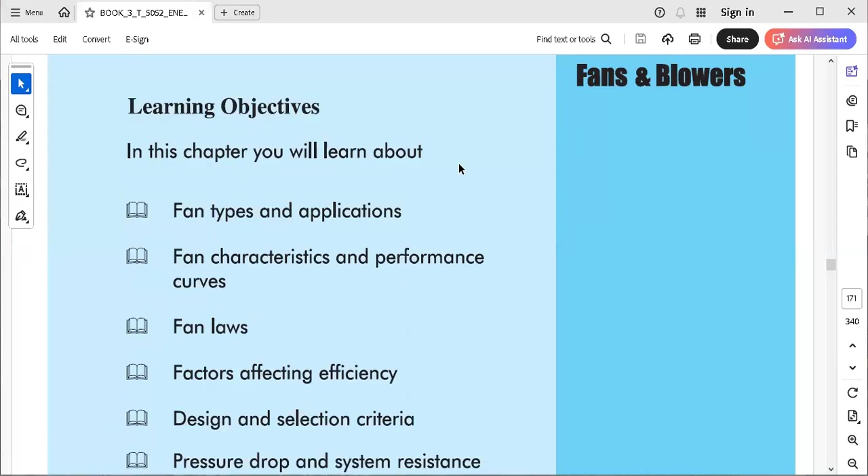Today's lecture is related to fans and blowers, which is book number 3, chapter 5. In this chapter, we are going to discuss fan types and their applications, fan characteristics, performance curves, what fan laws are considered for this performance, fan efficiency and the factors affecting it, and design and selection criteria. Then the major thing affecting fans is pressure drop and its resistance, known as system resistance. Then we discuss flow control strategies, performance assessment, and at the last, the saving opportunities for fans and blowers. That is the main thing we are going to discuss at the end.

Now, when we start with fans and blowers, they are classified into 3 categories: one is fans, another is blowers, and the third is compressors, which provide air for ventilation and industrial process requirements. Their function is to pressurize the air or gas, and move it, force it to move the gases and air against the resistance, the resistance caused by ducts, dampers, and other equipment.

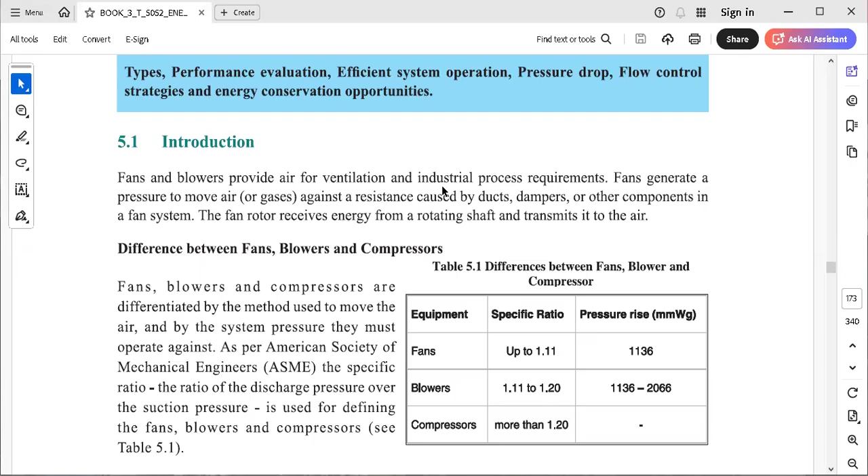As we discussed in fluid mechanics during our engineering days, there is resistance for the fluid. The same resistance applies to this airflow as well. This resistance is overcome by the rotor, the fan rotor, which consumes electricity, and that is transferred to the rotating shaft and the motor.

Now, how do you differentiate fans, blowers, and compressors? These 3 are considered with the help of a specific ratio. What is meant by specific ratio? The specific ratio is the ratio of the discharge pressure over the suction pressure. And this specific ratio is different for all these components, that is fans, blowers, and compressors.

For fans, it is up to 1.11. For blowers, it is 1.11 to 1.2. And for compressors, it is more than 1.2.

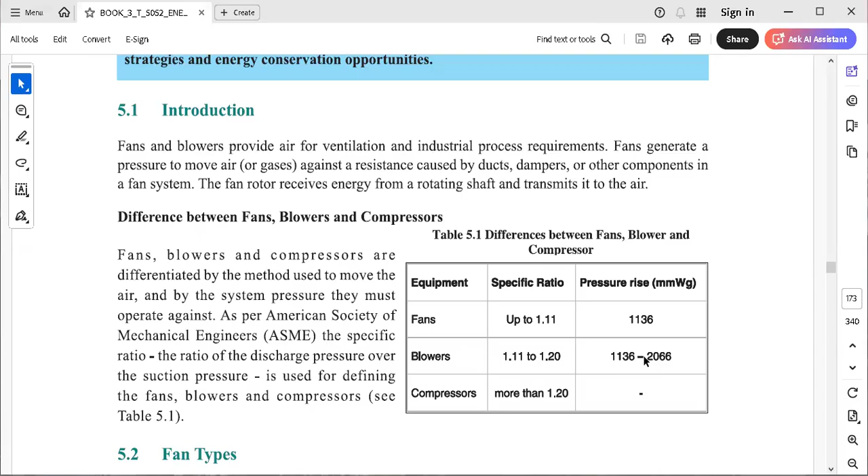When we see these 3 components, fans are used mainly for high discharge and low pressure, where the pressure rise is up to 1136 mm of water column. For moderate pressure and moderate discharge, we go for blowers, where the specific ratio lies between 1.11 to 1.2, and the pressure rise is 1136 to 2066. But for small capacity with high pressure compared to fans and blowers, we have to move to compressors.

Try to highlight the volume flow rate, pressure, and types of materials handled. Also, we have to consider the space limitations and the efficiency. The different efficiencies are mentioned, including the airfoil and backward curve inclinations.

So the efficiency for this airfoil and backward curve or inclined centrifugal fans has the highest one, that is 79 to 83%. And then the efficiency slightly goes on decreasing for the modified radial, then pressure blower, then forward curves.

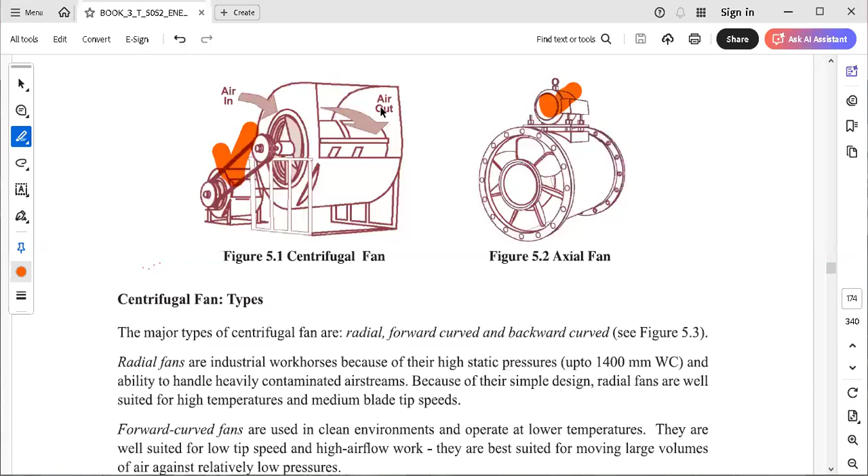Now, again in centrifugal types, they have classified as radial fans. This is the radial fan.

Most of the industrial workhorses concentrate on these radial fans for high static pressure, which is up to 1400 mm of water column, and the ability to handle heavily contaminated air streams. They have good simple design, radial fans which are well suited for high temperatures and medium blade tip speeds.

The second one considered is the forward curve. So this is the radial blade, and the second one is the forward curve. Now, the forward curve is used in clean environments and operates at lower temperatures. They are well suited for low tip speed and high-airflow work.

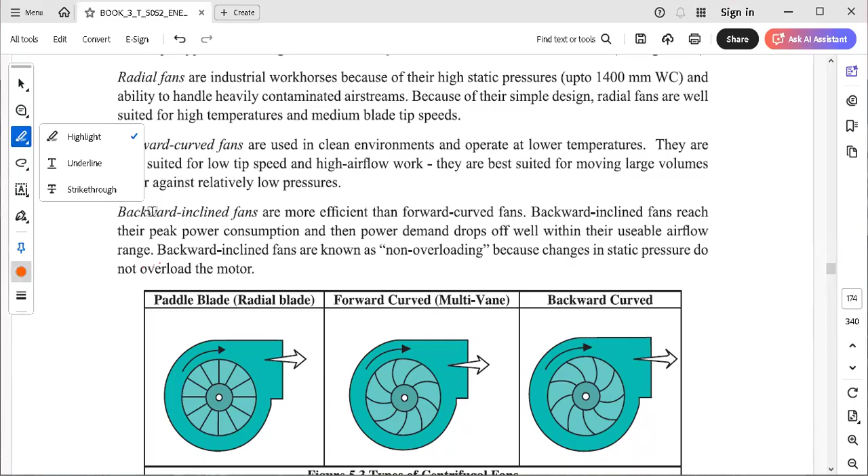Which they are suited for, low tip speed and high-airflow work.

The third one is the backward-inclined fans, which are considered to be the most suitable or more efficient than the forward curve fans, which reach the peak power consumption, and then the power demand drops off well within the usable airflow range.

These backward inclined fans are known as non-overloading fans. This is the third one, the non-overloading fans. So these are the three types in the centrifugal fans.

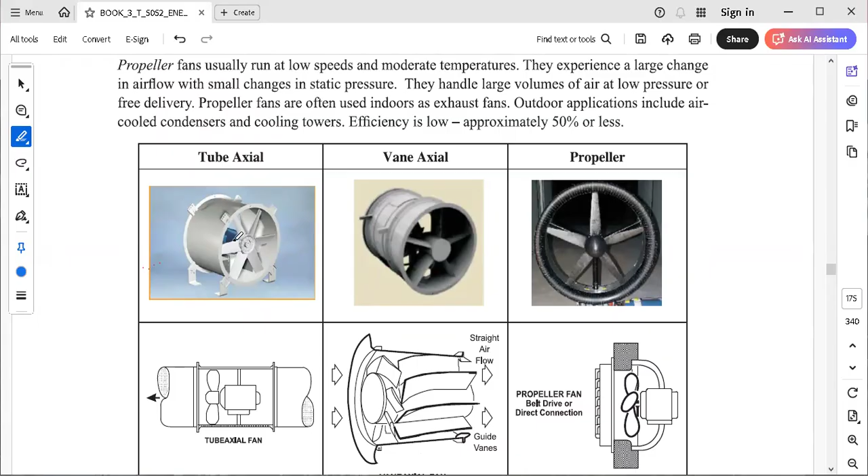Next point is the axial flow fans, shown here. First one is the tube axial, where the fans are kept inside the tubes and mostly they are coupled with the motors.

Second, the tube axials, which are kept in a cylindrical housing and have very close clearance between the blade and housing, which improves the airflow efficiency. These fans run faster than the propeller fans, operating at higher pressures of 250 to 400 mm of water column, and their efficiency lies around 65%.

Next is the vane axial. Now in this vane axial, the vanes are guided to the incoming air. These are also kept inside cylindrical portions, but with guided vanes, which improve the efficiency and give direction to the flow.

They also have high static pressure with less dependence on the duct static pressure. Such fans are used generally for pressure up to 500 mm of water column, which are more energy efficient fans available and should be used whenever possible. So whenever we recommend, we have to recommend the vane axial fans.

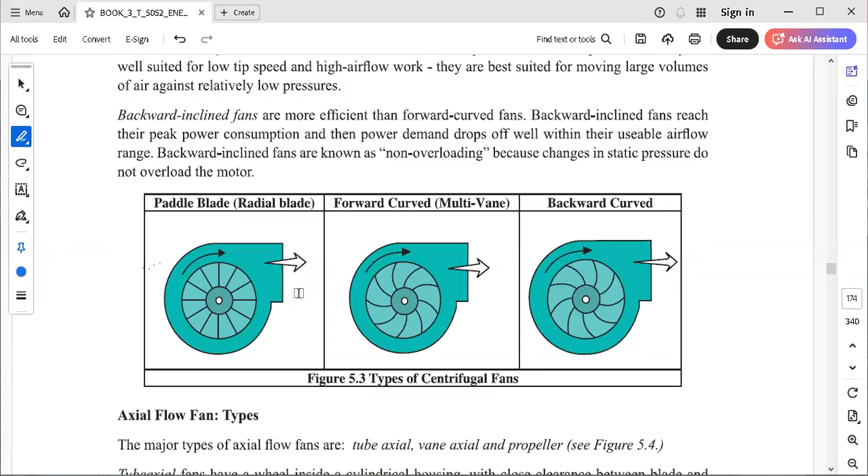They are often used indoors as exhaust fans. Outdoor applications include air-cooled condensers and cooling towers. Their efficiency is as low as approximately 50% or less. So these are the three which come under the axial flow types of fans, and these are the three which come under the centrifugal fans.

Now the next point is common blower types. Blowers can achieve a much higher pressure than fans. In one book where I have taken a unit on fans, blowers, design of fans, blowers and compressor, they mentioned that for higher pressures, blowers achieve much higher pressure than fans, which has 1.2 kg per centimeter square.

Now they are used for negative pressures in industrial vacuum systems as well. Their major types are centrifugal blower and positive displacement blowers.

Now when we go with centrifugal blowers, they work like centrifugal pumps. The impeller is typically gear-driven and rotates as fast as 15,000 rpm. In multi-stage blowers, the air is accelerated as it passes through each impeller, and in a single stage blower, the air does not take many turns, hence it is more efficient.

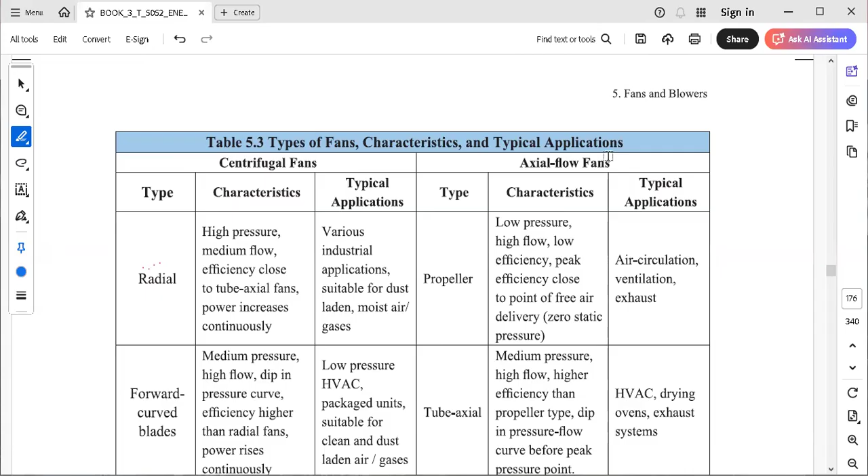Now this will give us a typical differentiation for centrifugal fans and axial flow fans. Among them, there are three types where we can use all three.

If you go with radial centrifugal fans, high pressure and medium flow is considered, with efficiency close to tube axial fans, and power increases continuously as a characteristic of radial fans. Their typical applications are various industrial applications suitable for dust-laden and moist air and gases.

Now, forward curved blades give medium pressure to high flow, a deep dip in the pressure curve, and their efficiency is higher than radial fans, though power rises continuously - this is the drawback of forward curved blades. Their typical applications are low pressure HVAC systems and packaged units, suitable for clean and dust-laden air gases.

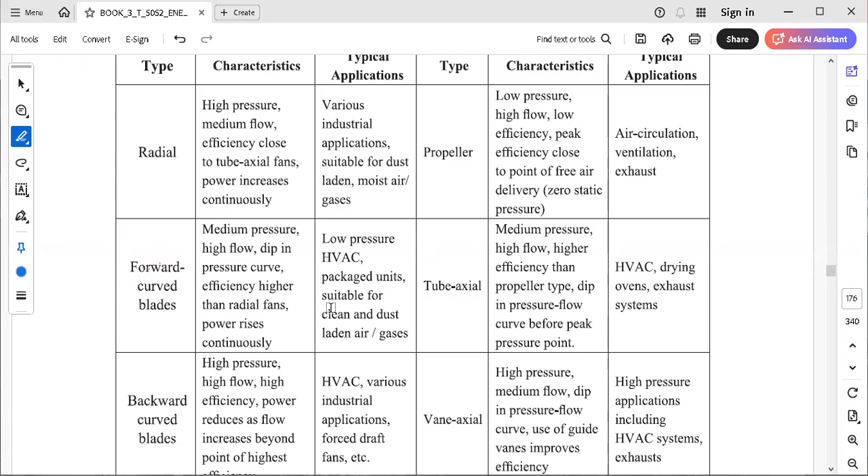The more efficient type is the backward curved blades. They give high pressure, high flow, and high efficiency. The power reduces as flow increases beyond the point of highest efficiency, so keeping this high efficiency means power consumption decreases. HVAC, various industrial applications, and forced draft fans are the main applications of backward curved blades.

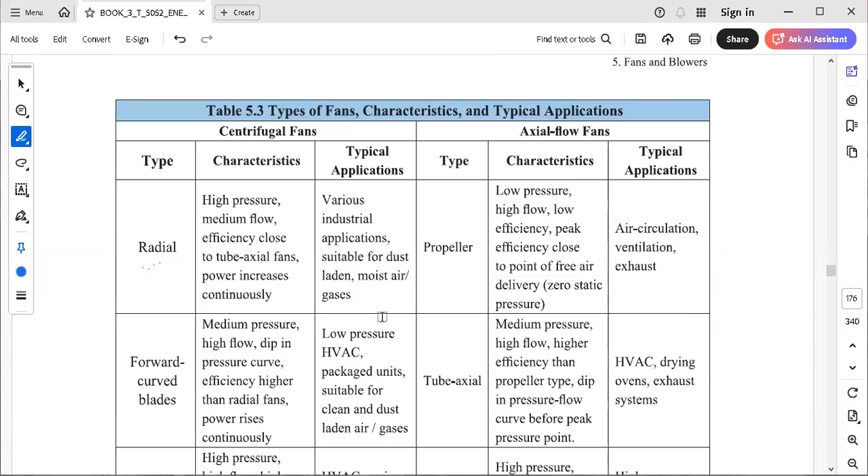The last is the airfoil type, same as the backward curved type, which has the highest efficiency, used for different applications like HVAC and various industrial applications. But the axial flow type blades require clean air, so whatever application we take, the air or gas should be clean if we go with axial flow fans. Then again, three types are there: propeller, tube axial, or vane axial.

If you go with propeller type, they have low pressure, high flow, which gives them low efficiency. The peak efficiency is close to the point of free air delivery, that is zero static pressure. So they are used for air circulation, ventilation, and exhaust.

Second is the tube axial, which gives medium pressure, high flow, higher efficiency than the propeller type. They dip in the pressure flow curve before the peak pressure point. Their applications are HVAC, drying ovens, and exhaust systems.

The most efficient is the vane axial, which gives high pressure, medium flow, then a dip in the pressure flow curve; the use of guide vanes improves efficiency. High pressure applications include HVAC systems and exhaust. So these are the applications for the different axial fans and centrifugal fans.

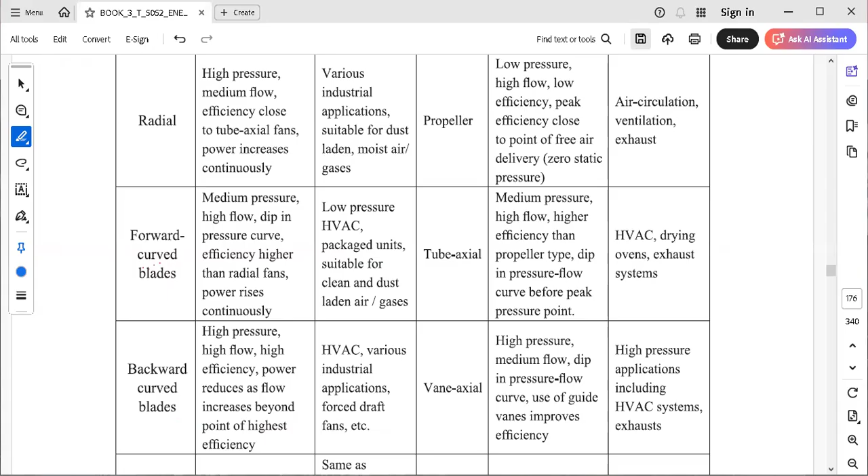They have mentioned that positive displacement blowers have rotors which trap the air and push it through the housing. So positive displacement blowers provide a constant volume of air even if the system pressure varies, so they are suitable for applications prone to clogging. Since they can produce enough pressure, typically up to 1.25 kg per centimeter square, and they turn much slower than centrifugal blowers - centrifugal blowers run at 3600 rpm - positive displacement blowers are often belt driven to facilitate speed changes.

Now, whenever we consider fan performance, their evaluation and efficient system operation, some characteristics we have to consider. First is the system characteristic. Whenever we say system characteristics, the first term that comes to mind is system resistance, which is used when referring to static pressure. The system resistance is the sum of static pressure losses in the system.

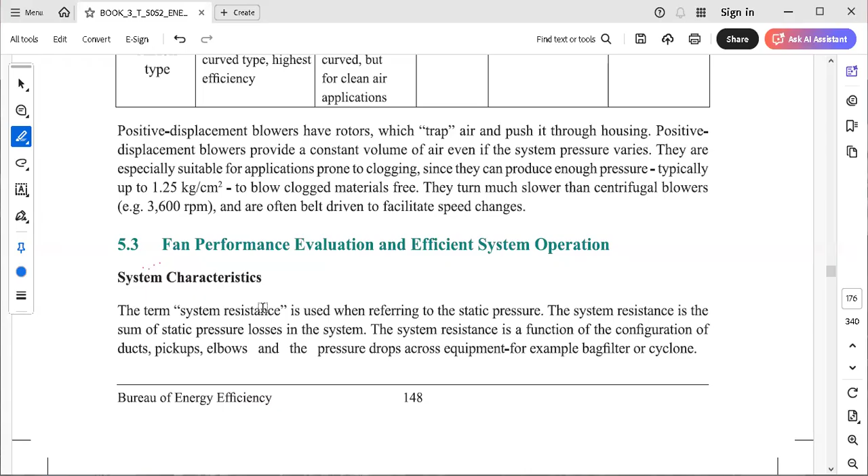Now here we have to note that the system resistance varies with the square of the volume of air flowing through this system. So whenever we consider any system resistance, its airflow matters a lot. The resistance increases directly proportional to the square of the volume of the air.

Conversely, the resistance decreases as flow decreases. So to determine the volume the fan will produce, it is therefore necessary to know the system resistance characteristics. In existing systems, the system resistance can be measured. However, for specifically designed systems, we have to calculate the system's resistance.

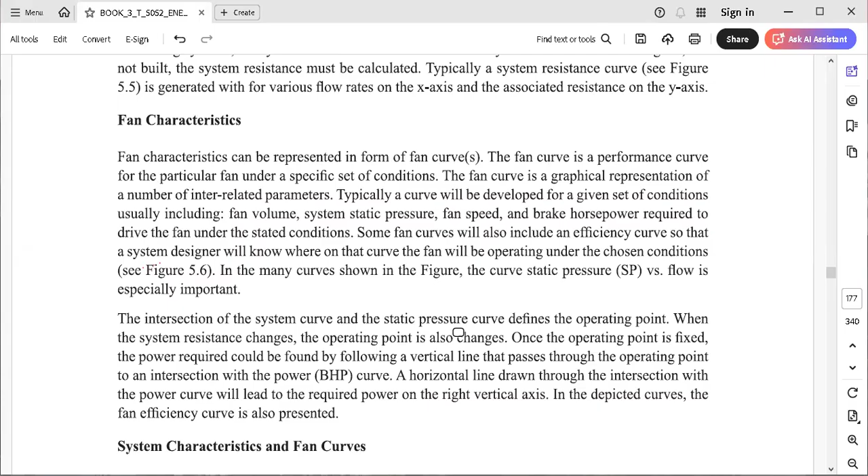Now, the next point is related to the fan characteristics. The fan characteristics are represented in the form of fan curves. The fan curves are the performance curves for a particular fan under a specific set of conditions. They give us an idea about the fan volume, system static pressure, fan speed, and the brake horsepower required to drive the fan under stated conditions. Some fan curves also include efficiency curves, so that the system designer will know where on that curve the fan will operate under the chosen conditions.

The fan characteristic curve where static pressure, SP, versus flow, is especially very important for consideration.

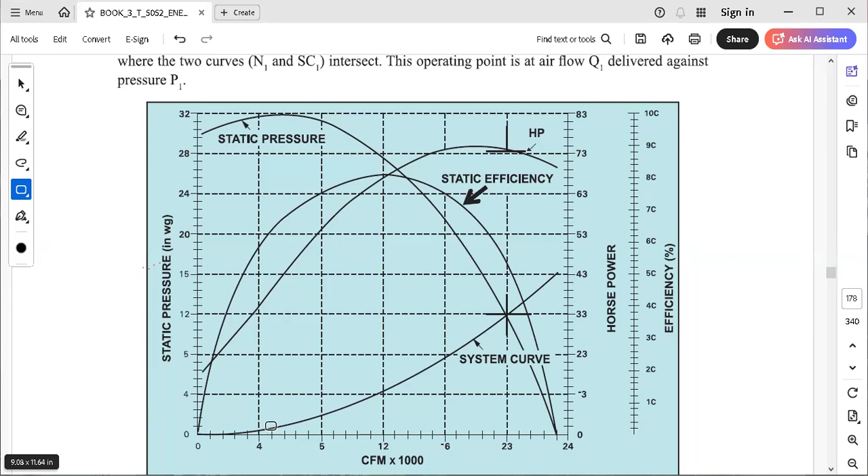Now my aim is to reduce this consumption. So I have two methods or options to do that. Either I have to reduce the speed, so instead of going for N1, I go for N2.

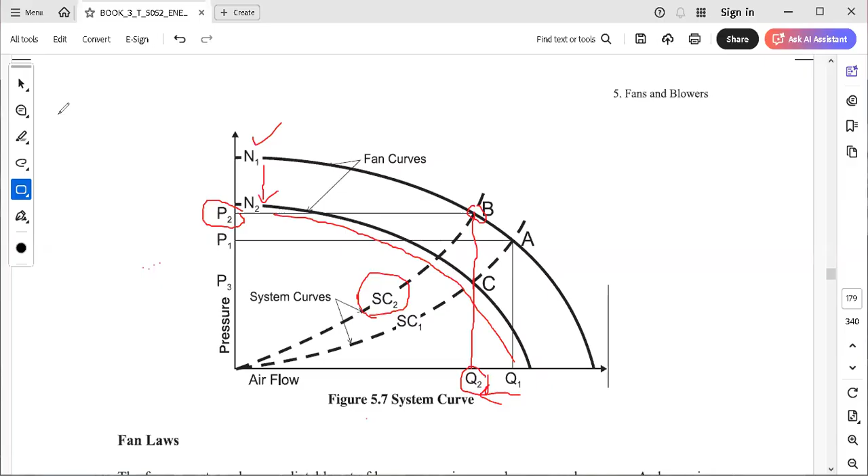Reducing the fan speed is a much more efficient method to decrease the airflow since less power is required and less energy is consumed. This is shown in our diagram 5.7, the pressure versus system curve, pressure versus airflow.

Now the three fan laws are considered or used. First is flow versus speed. Second is pressure versus speed square. And third, power versus speed cube. So the fan operates under a particular set of laws, considering speed, power, and pressure.

When you plot flow versus speed, it becomes a straight line. That is, flow is directly proportional to speed. So Q1 upon Q2 is equal to N1 upon N2. So when you reduce the speed, automatically the discharge will be reduced.

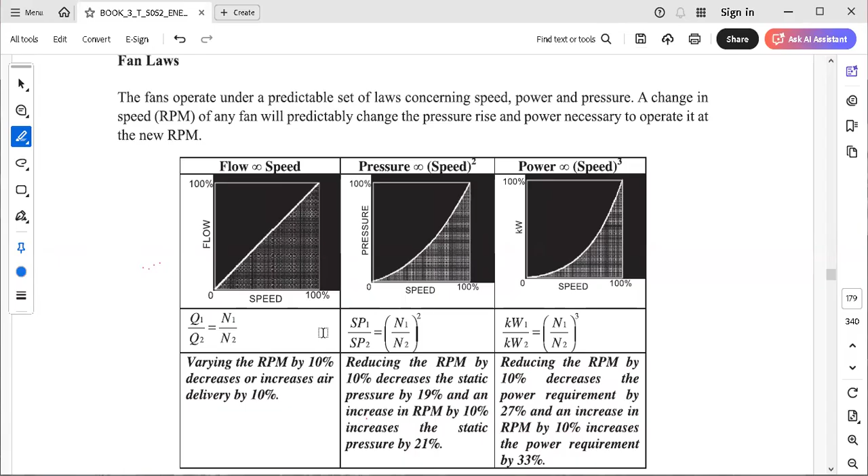So these are the questions I think they will ask for your MCQs, multi-choice questions. There are some numericals also, where we require these equations or formulas.

Now the next point is related to fan design and selection criteria. We have to precisely determine the airflow and the required outlet pressure, which are most important in proper selection of fan type and their size.

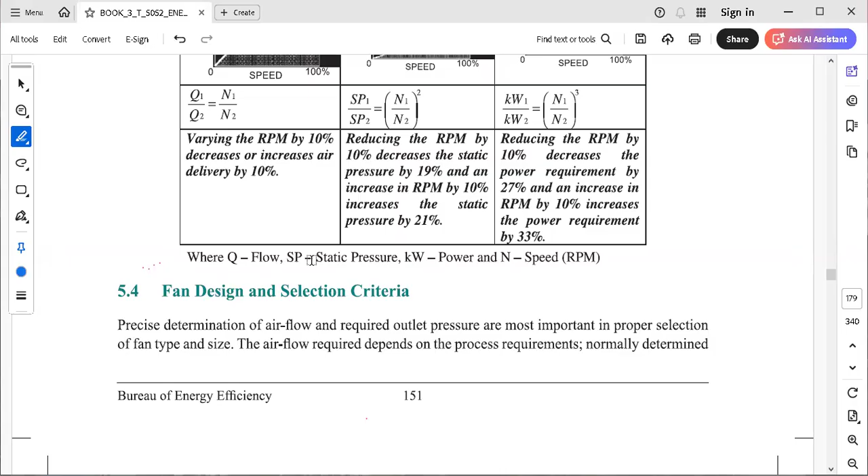So to find that out is again a big challenge for us, because we have to consider the heat transfer rates, combustion air, or flue gases quantity which we have to handle.

The system pressure requirement is usually more difficult to compute and predict. These pressure drops should be added to the fixed pressure requirements of the process. The pressure drops, as we know, are because of the bends,

the friction between the fluid and the duct surface, then different cross-sectional areas. So that pressure drop we have to consider, especially in the case of ventilation fans,

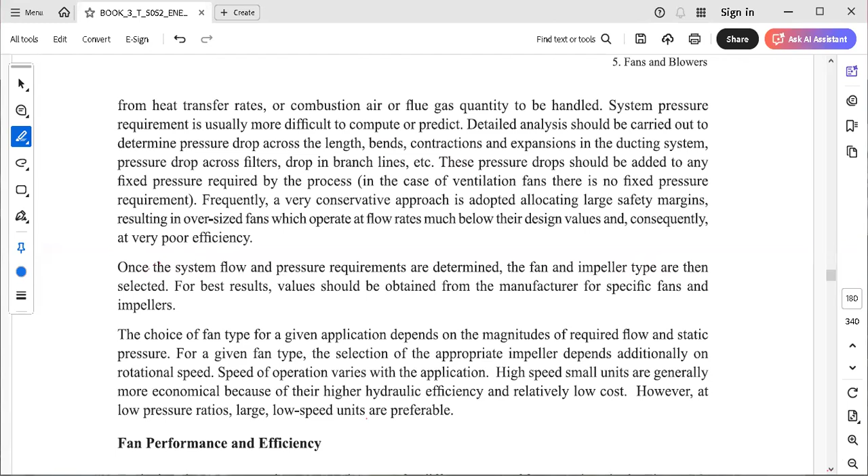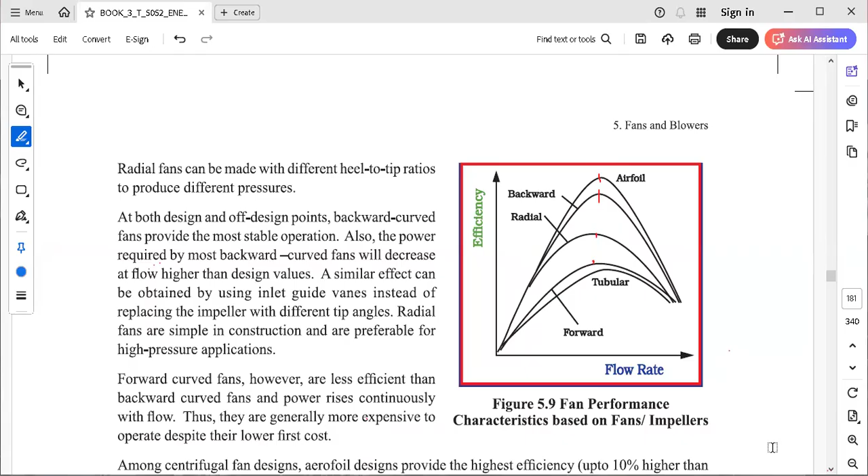Now, among the centrifugal fan designs, the airfoil designs provide the highest efficiency, up to 10% higher than the backward blades, and their use is limited to clean and dust-free air.

The axial fans produce lower pressure than the centrifugal fans, but they exhibit a dip in pressure before reaching the peak pressure point.

Next, the propeller type fans are capable of high flow rates at lower pressures, while the tube axial fans have medium pressure and high flow capability and are not equipped with guide vanes. So these are some characteristics they have mentioned.

Then vane axial fans, which are equipped with inlet and outlet guide vanes, are characterized by high pressure to medium flow rate capabilities. The most important part we have to discuss here is the performance of these curves.

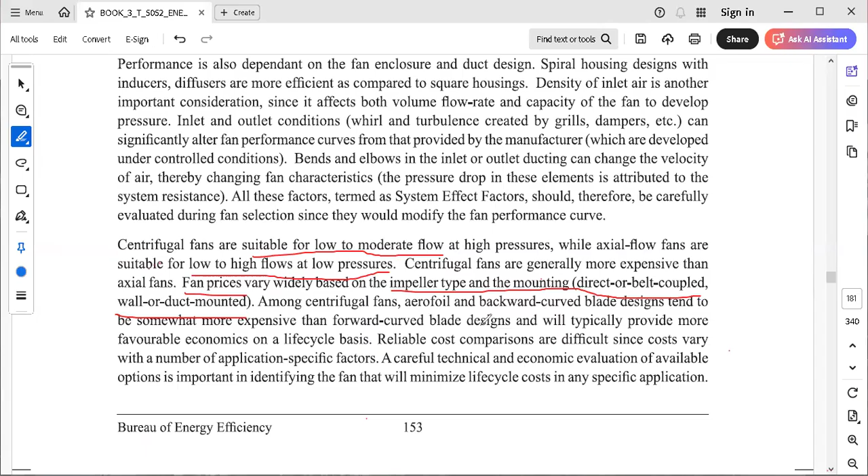In this parameter, centrifugal fans with airfoil and backward curve blade designs tend to be somewhat more expensive than forward blade designs, but give more favorable economics on a life cycle basis. So if you consider their life, more favorable economics are provided by backward curved blade, aerofoil, centrifugal fans. But one point they have mentioned is that reliable cost comparisons are very difficult.

Since the cost varies with the number of applications and application-specific factors, we have to choose the fans with the help of technical and economic evaluation of available options, considering the minimum life cycle cost.

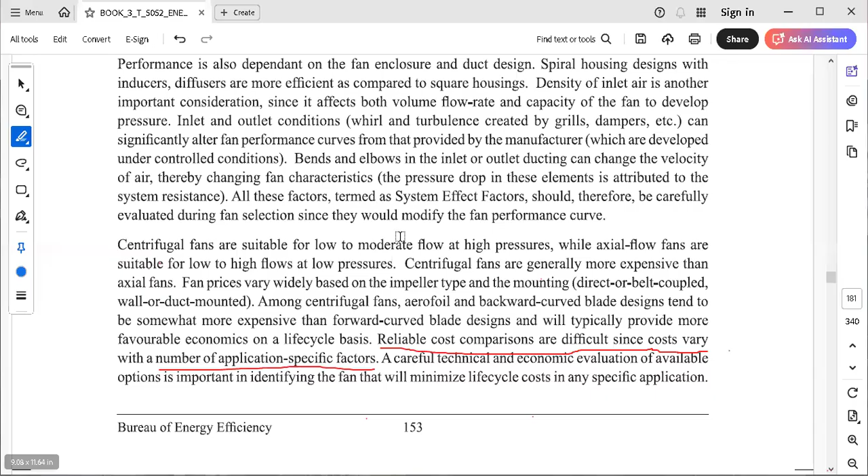The next point in this chapter is related to safety margins. Safety margins are another parameter which will affect the selection of the fan. The choice of the safety margin affects the efficient operation of the fan.

If you consider the boiler, the induced draft fan can be designed with a safety margin of 20% on volume and 30% on head basis, while the forced draft fans and primary air fans do not require any additional safety margin.

However, the safety margins already considered for them are 10% of the volume and 20% of the pressure. But this is for specific conditions. If you go with a generalized approach, the safety margin is almost 5% over the maximum requirement of the flow rate.

So we have to consider a 5% safety margin for general applications. However, for boilers it's 20% on volume and 30% on head basis, and for forced draft and primary air fans, 10% by volume and 20% on pressure head.

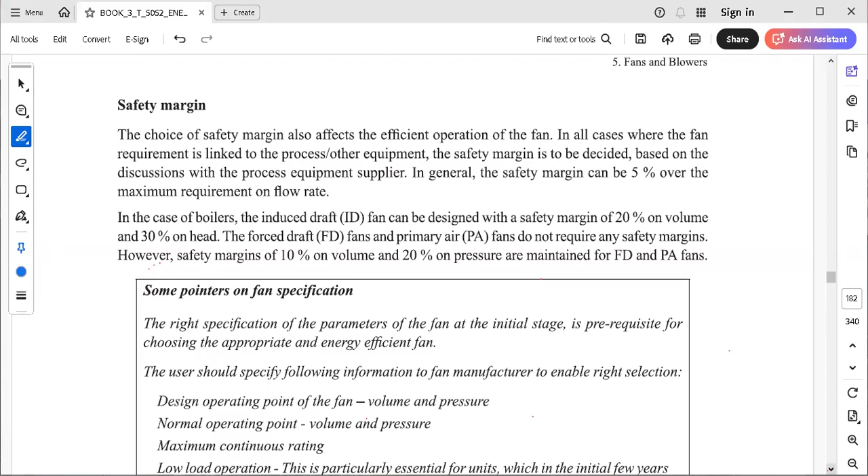Now the next point they have mentioned is fan specifications - some points which we have to consider for the fan specifications.

Sir, am I audible? Yes, yes, okay. If you want to add anything, you can please convey. No issue.

Now some specific points on fan specification which we have to consider while either replacing the fans or specifically designing the fans. The first point mentioned is the design operating points of the fans should be volume and pressure. Then what will be the normal operating point - volume and pressure. What is its continuous rating, maximum continuous rating? What will be its low load condition?

They have marked that whenever we design, we are designing on a long-term basis. So when we select the fans, initially for the first few years, it may happen that we have to run the fans at lower capability. So low load operation is a major parameter to consider. At a later stage, once upgradation or expansion of the unit has occurred, then they will go with higher load operation requirements. So they have mentioned specifically that we have to take the manufacturer's consent for selecting both conditions - the initial low load condition and the final high load condition.

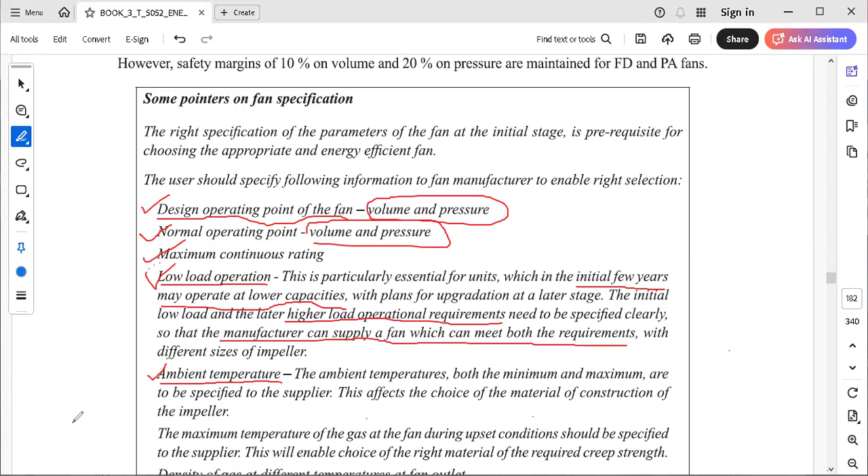The next parameter they mentioned is the ambient temperature, because the temperature also affects the density of the air, and as the density of the air affects, the volume flow rate is definitely affected. So this density of the gas, we have considered the ambient temperature.

Now the next is the density of the gas at different temperatures, which we have to consider for the fan outlet. Then the composition of the gas. As we are handling flue gases, we know we have water vapors, CO2, CO and other gases as well.

That composition is very important while choosing the material of construction of the fan. Then dust concentration and nature of the dust, whether it is bagasse dust or coal hard dust, we have to consider while designing the fan. So dust concentration is a major parameter for that.

The next point they mentioned is that the operating frequency varies from plant to plant, so depending on the source of the power supply we have to adjust accordingly. Since frequency directly affects the speed of the fan, the frequency being maintained in the plant also needs to be specified to the supplier when it supplies the fans or blowers.

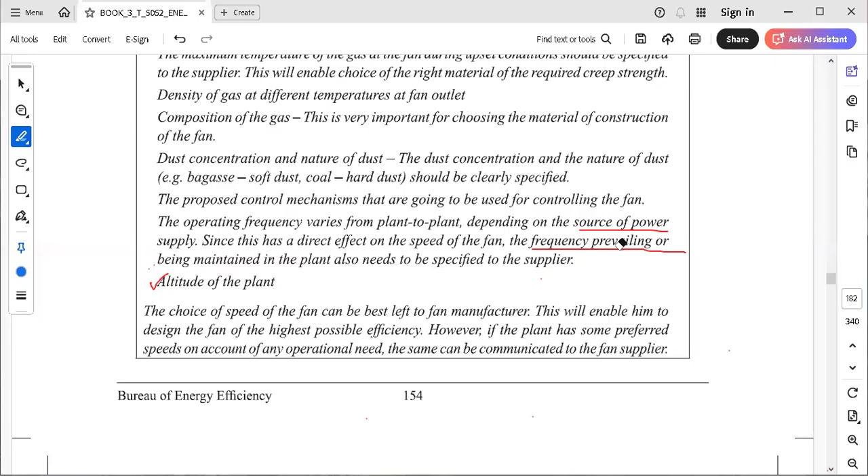Also, the last point is the altitude of the plant, which we have to give to the manufacturer. Accordingly, they will suggest, so while choosing the fan we have to consider all these points. The choice of speed of a fan can be best decided by the fan manufacturer, so this book emphasizes that we have to take the opinion of the manufacturer for considering all these points for our applications.

Now the next point is related to system resistance and pressure drop. As we all know, whenever there is a fluid flow, there is resistance to the flow, and that resistance drops the pressure. Some applications require a specific pressure, some require a specific volume, and some require a specific temperature, but the main things we consider are volume and pressure.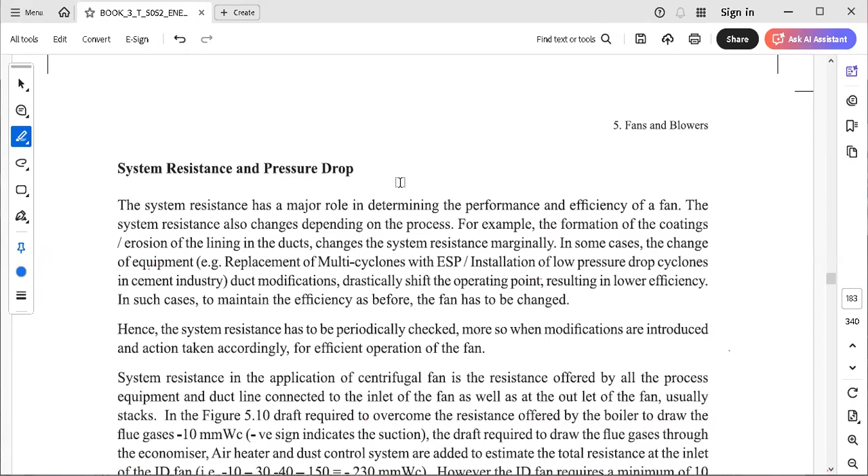So they have mentioned one diagram over here. This is the diagram which gives us the pressure drop across various equipments. They mentioned that system resistance has a major role in determining the performance and efficiency of a fan.

Then we have to go for duct modifications, or drastically shifting the operating points, which will result in lower efficiency. So we have to consider these points while considering pressure drops, and this system resistance should be considered periodically.

Now this is the one case study that they have mentioned. We know there is a boiler, whenever there is a boiler there is fire, and flue gases come out of the boiler. When the flue gases come out of the boiler, if you measure the pressure, it becomes minus 10 mm of water column.

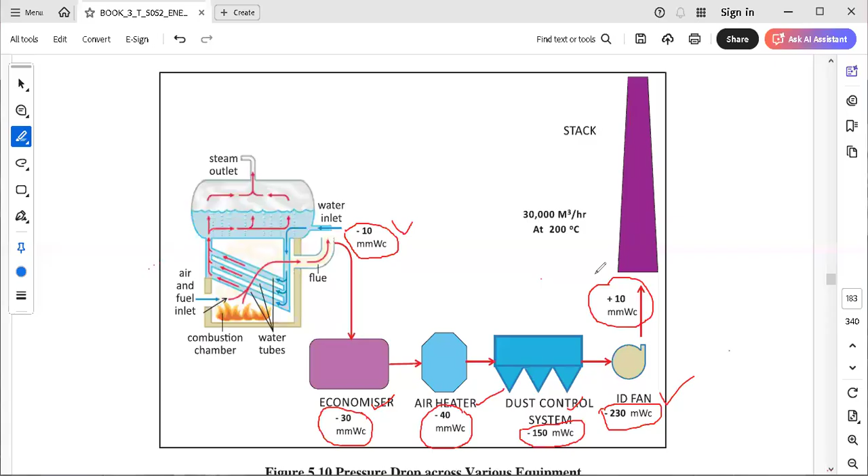But not only that, the ID fan has to suck the flue gases from all these equipments — the boiler, economizer, air heater, and dust control. That ID fan also has to push the flue gases to the stack or chimney, and the resistance offered by the stack is plus 10 mm of water column. Now how to calculate the total resistance? For that they have mentioned over here.

So here they have mentioned, if you want to calculate the total outlet and inlet pressure, or total overall resistance, that is a pressure drop, we have to subtract the suction side from the positive side. So 10 minus of minus 230 becomes 240 plus 240 mm of water column, and that is the total resistance which will be for the air or flue gases which the ID fan has to force.

So this will be the resistance calculation, or pressure drop calculation, for boiler flue gases which is coming out of the boiler.

Now the next point in this, they have mentioned is the fan system curve. Now how to choose a particular fan for our system resistance curve? We have calculated the 240 mm of water column, that is our system curve, right? For that, the system curves we have drawn against the total pressure drop against the flow rate of flue gases. This curve will be the system resistance curve for the different flow rates.

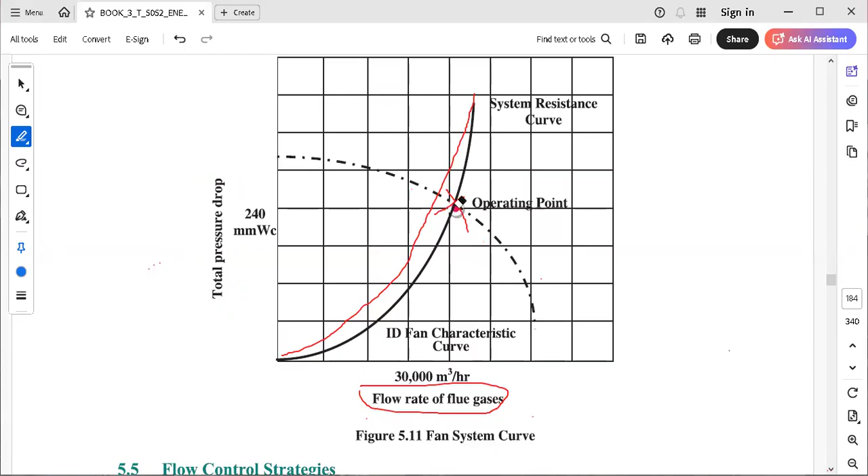Now we have to adjust a curve, that is the system curve or static pressure curve, such that it will intersect at this operating point. And accordingly we have to choose the fan or centrifugal pump for our ID fan application, which is installed before the stack and after the precipitators. So they have mentioned over here that this operating point we have to choose.

The system resistance is a function of gas density and velocity of the gas. After the boiler firing is started, there is a continuous increase in generation of flue gases, and accordingly a continuous increase in the velocity of the gases and continuous increase in draft. When the boiler is fired at rated capacity, the generation of flue gases is maximum, resulting in corresponding pressure drop, which is the operating point. This is the operating point.

So for this operating point, we have to find out the dotted curve which passes through this operating point. So a characteristics or performance curve passing through the operating point of the system at the highest possible fan efficiency has to be selected for the better utilization of energy.

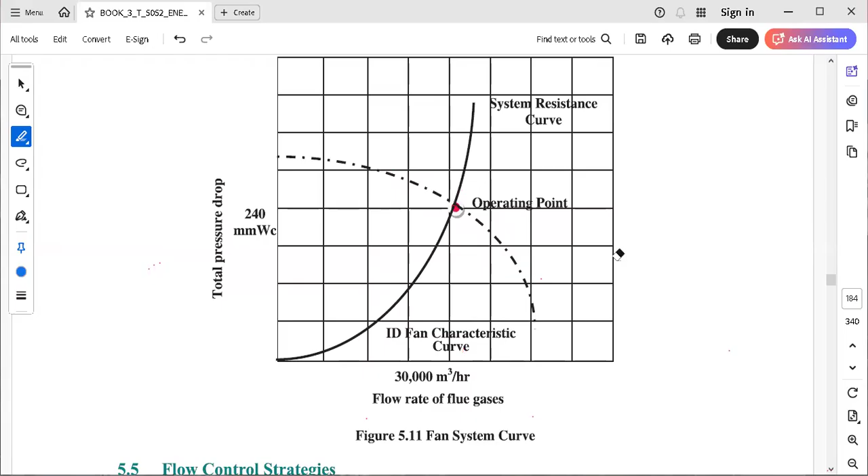So what we have to do is find out the operating point where the boiler is fired at 240 mm and this Q is there. So that performance, we have to find the best suitable point which is near to this one. Among these points 1, 2, and 3, whichever gives the highest efficiency, that we have to find out, and that fan we have to select for the ID fan.

Now, a few flow control strategies are also explained in this chapter. The different flow control strategies they have considered over here: pulley change, damper control, inlet guide vanes, variable speed drives. These are the different ones.

This flow control—why do we have to go for flow control? Because as we know, fans normally work at steady or constant speeds. So the fans which operate at constant speed, their flow will be constant and their energy consumption will be constant. However, in some cases, the flow requirement—air or gas flow requirement—will vary. At that time, we have to reduce the energy consumption by reducing the speed.

So on these occasions, the speed change is desirable, and adding a new run to the duct requires an increase in airflow, that is volume, through the fan. In such instances, the fan becomes oversized or flow reductions occur. So the different things considered are: pulley change, damper control, inlet guide vanes control, variable speed drives, series and parallel operations. These are the few considered points for the flow control strategies.

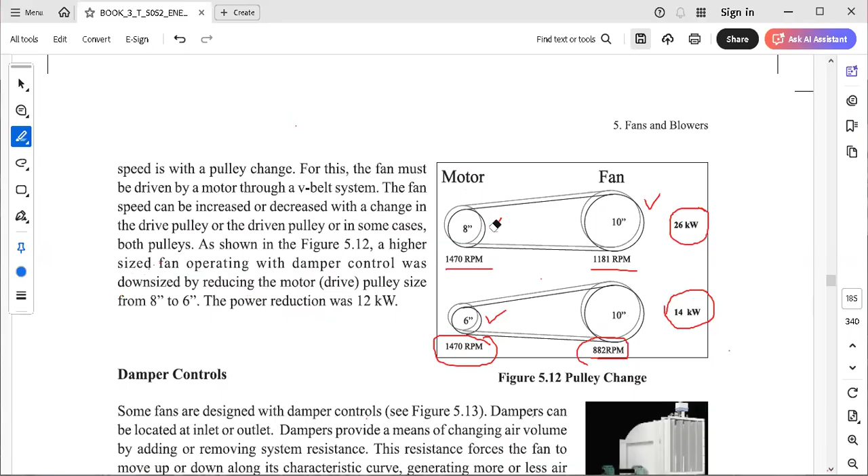That is, the power reduces to 14 kilowatt. So they have mentioned that for higher size fans operating with damper control, downsizing the motor drive pulley size from 8-inch to 6-inch gives a power reduction of 12 kilowatt. So this is one of the methods that reduces power consumption.

Second method is the damper control. In damper control, the dampers are used at the inlet and outlet portions. The dampers will reduce the flow, however it will increase the pressure. So the damper provides a means of changing the air volume by adding or removing system resistance. This resistance forces the fan to move up and down along its characteristic curves, generating more or less air without changing the fan speed. But this will be a limited amount of adjustment.

And they are not energy efficient because the motor is consuming that much power continuously; we are only controlling the flow. So they are not that much efficient, but however, we can control the flow with this method.

Next is the inlet guide vanes. The inlet guide vanes are curved portions or curved sections that lay against the inlet of the fan when open. So the air entering inside the fan is guided, and when closed, the guide vanes give a pre-swirl of the air entering the fan housing, and this changes the angle at which air is presented to the fan blades. So the air which enters the fan has a particular direction.

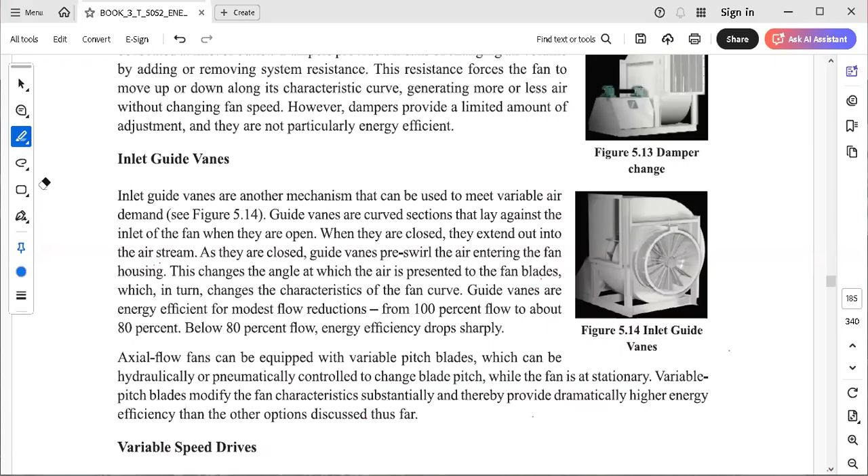The next point is variable speed drive. The variable speed drive is efficient, however they are the most expensive. But they will give infinite variable speeds to control. So if you need N1, you can go for N1; if you go for N plus one, variable speeds can be achieved with variable speed drives.

But this will reduce the speed of the fan and eventually the flow requirements. The fan performance can be predicted at different speeds using the fan laws. However, the power input to the fan changes as the cube of the flow. This is usually the most efficient from the capacity control perspective.

However, there are a few drawbacks of this system. They may not be economical for systems that require infrequent flow variations, when considering the variable speed drives and efficiency of the control system, that is fluid coupling, eddy currents, VFD, etc. This should be accounted for in the analysis of power consumption when you consider variable speed drives for reduction of fan speeds.

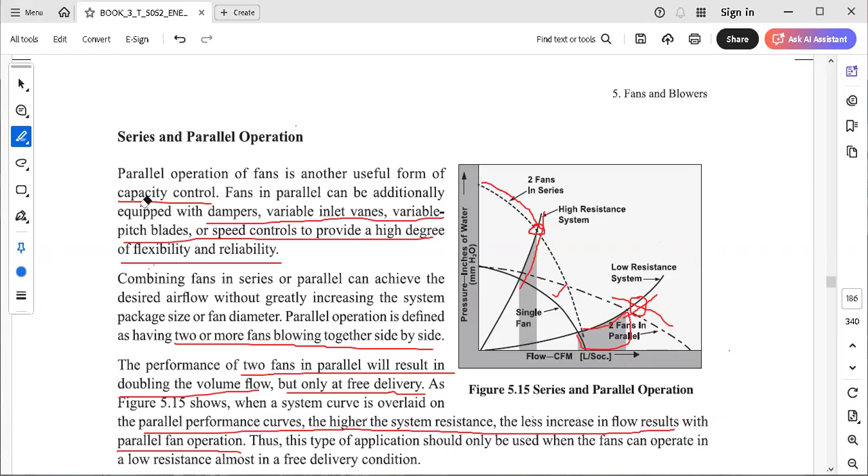However, if you go with two in series, then with multiple fans, a push-pull arrangement is considered, and the static pressure capability at a given airflow can be increased. So this high pressure curve will show that the static resistance or static pressure goes on increasing.

And in series operation, the best results are achieved in systems with high resistance. So if we want to achieve best results, we have to give high resistance - we have to overcome the high resistance. So whenever we go with this arrangement, they mention that we have to consider this series combination and parallel combination.

Both series and parallel operations, particular with multiple fans, certain areas of the combined performance curves will be unstable and should be avoided. This instability is unpredictable and is a function of the fan and motor construction and operating points.

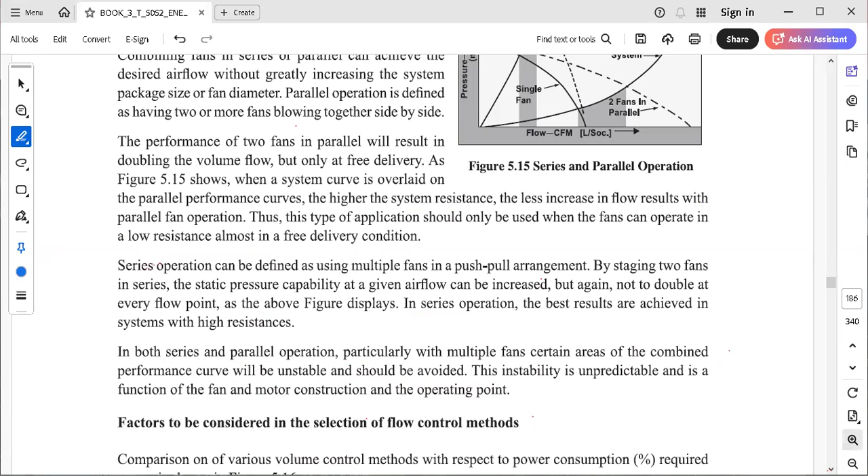They mentioned that series operation gives the best results in systems where resistance is high to the gases or fluids, and parallel flow is considered where curves show less increase in flow with parallel operation, or where low resistance is present for the gas or fluid flow. So we can operate parallel systems in low resistance areas and series systems in high resistance areas. Next point is the factors to be considered for the selection of flow control methods.

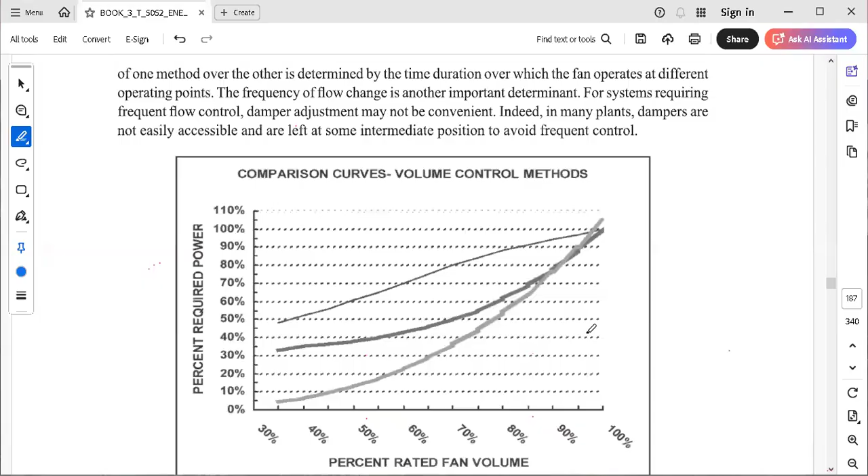So they have given a few considerations for this. There is a figure here, and they have compared three flow control strategies. The first strategy is the damper - I will write as A. Then second is the variable guide vanes, which I will write as B. And third is the adjustable speed drives, that is C.

Now, with A, that is damper, they mentioned that even though flow control is there up to 30%, if you control the flow, the power is only reduced up to 50%. However, if you go with variable guide vanes, power is reduced up to 30 to 35%. And if you go with adjustable speed drives, power is almost reduced to 0, or up to 5 to 7%. So among them, adjustable speed drives are more efficient.

Now, why is this happening? The reasons they mention are that if you go with dampers, even though we close the dampers, there will be leakages or slips of air from the dampers, so there will be power required to overcome that. So only 50% energy will be saved.

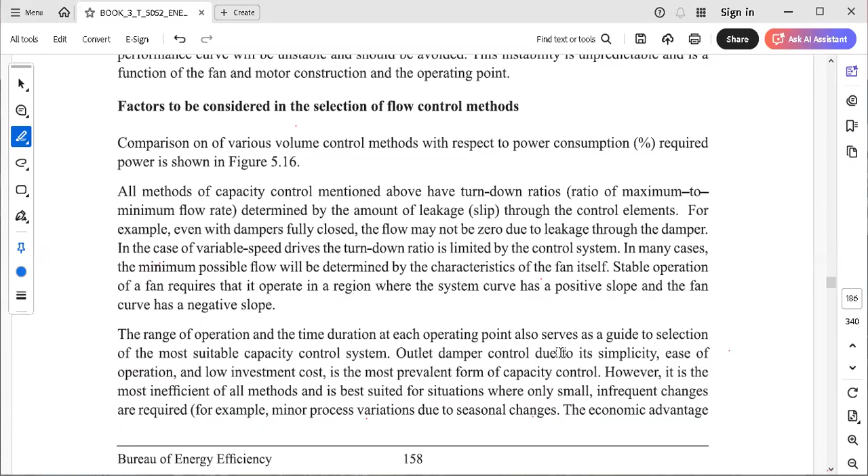So it is best suited for situations where only small and infrequent changes are required, for example minor process variation due to seasonal changes, where we can achieve economic advantages over flow control. This economic advantage is considered with the help of different operating points. So one method is chosen over the other based on the time duration over which the fan operates at different operating points.

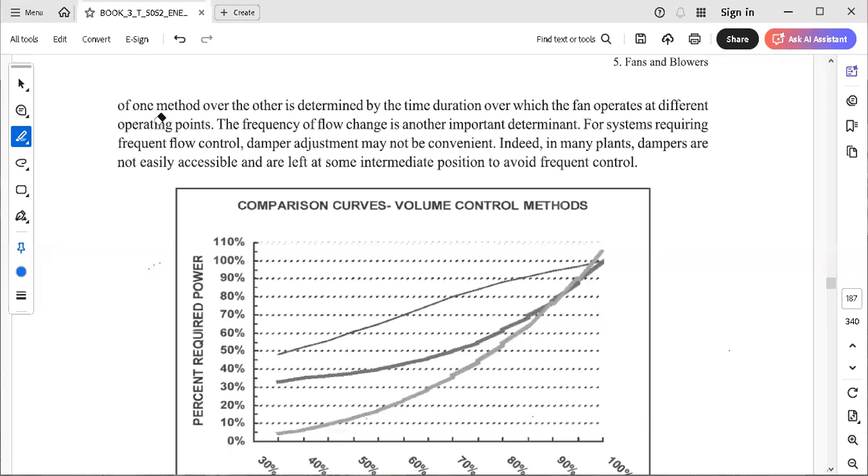So these are the things covered under the factors we have to consider for the selection of flow control methods. Now the next point, which is more related to performance, is that we have to assess the fan, that is, fan performance assessment.

When we go with an assessment, we have to measure the flow, we have to measure the head, and we have to measure the temperature on the fan side. And we have to find out the power rating input on the motor side.

Now if you go with flow measurement, we have to measure three factors. One is the static pressure. What is the static pressure? The static pressure is the potential energy put into the system by the fan. Here you can see one manometer connected to the pipe, and the static pressure is mentioned, which is in mm of Hg or mm of water column.

The second point is the velocity pressure. Here they have mentioned the velocity point. This velocity pressure is along the line of flow, and it cannot be calculated directly; it is the subtraction of total pressure and static pressure. It results from the air flowing through the duct, and this velocity pressure is used to calculate the air velocity.

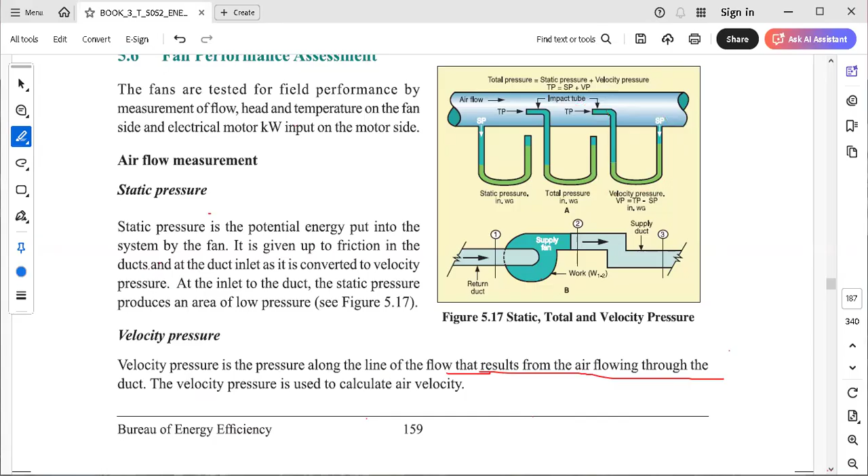So they have mentioned the equation for this. I will go to that equation and then come back to this one. So the total pressure is the summation of static and velocity pressure. In the previous diagram, we saw the difference between TP and SP that we have to calculate, inserted into the tube.

The velocity pressure and static pressure can change as the air flows through different sized ducts, so as the diameter of the duct varies, the static and velocity pressure can change. However, the total pressure remains constant; it changes only with friction losses. So this is related to static pressure, velocity pressure, and total pressure.

In this segment, the few things we have to note are that this fan flow is measured with the help of a pitot tube and manometer combination.

Sometimes they are used with a flow sensor, that is differential pressure instruments, or with an accurate anemometer. So three instruments we can use to measure the fan flow. One is the pitot tube with manometer combination. Second is the flow sensors with differential pressure instrument, and third is the accurate anemometer.

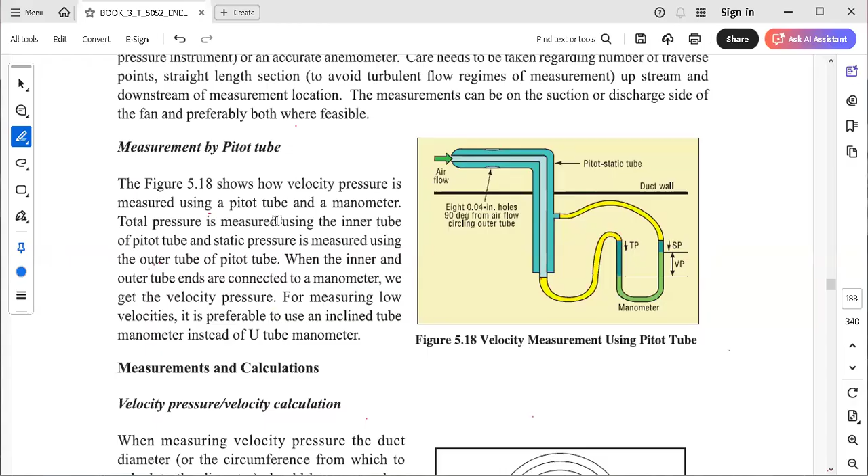The next point is how we have to measure and calculate. First, we have to measure the velocity points, velocity pressure, and the velocity. Here is one duct, its cross-sectional area they have taken, and they have mentioned different points.

We have to try to avoid measuring at the circumference or just inside the tube surface, because the layers inside the tube are mostly resistive, so the accuracy of the velocity pressures is restricted. The velocity pressures vary across the duct, and the friction slows the air near the duct walls. So velocity is greater in the center of the duct. We have to measure these velocities.

The velocity is affected by changes in ducting configuration, such as bends and curves. We have to take the measurements in a section of the duct that is straight line, and we have to take at least 3-4 diameters after any elbows, branch entries, or duct size changes.

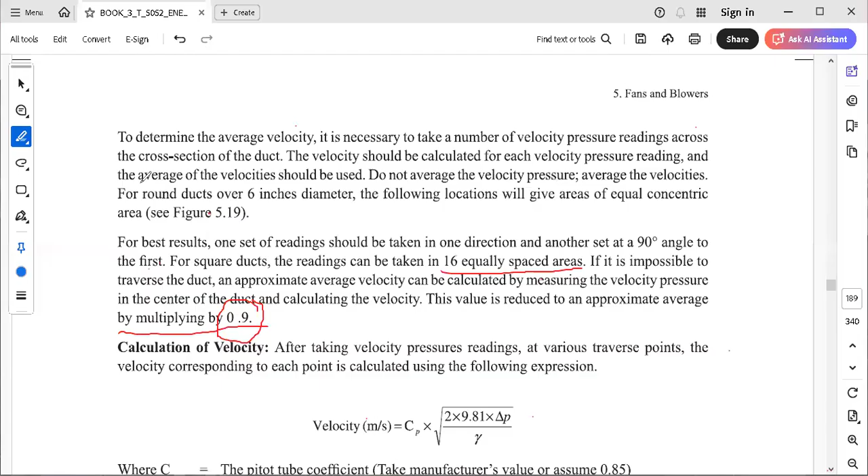Then how to calculate the velocity? They have mentioned it over here. The calculation of velocity, the formulas are given over here.

The velocity, in meters per second, is equal to Cp, and Cp stands for pitot tube coefficient, which is given by the manufacturer, or we have to assume it as 0.85. Then delta P, that is average velocity pressure, measured using the pitot tube and inclined manometer, by taking a number of points over the entire cross-sectional area of the duct.

Its value is in mm of water column, and gamma is the gas density at flow conditions, whose unit is kg per meter cube. So this becomes the equation for velocity: Cp into the square root of 2 into 9.81 into delta P divided by gamma.

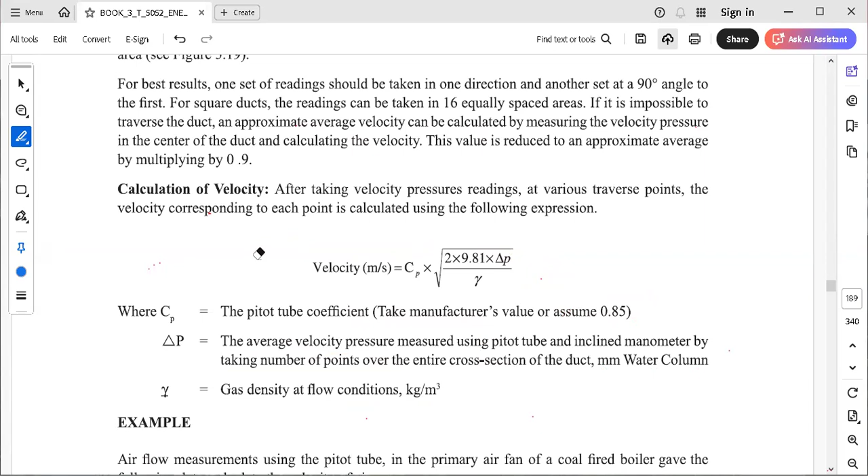So we have to take the product of all these three terms, then take the square root, and then multiply it with Cp. A simple example is also given over here.

The example is airflow measurement using the pitot tube.

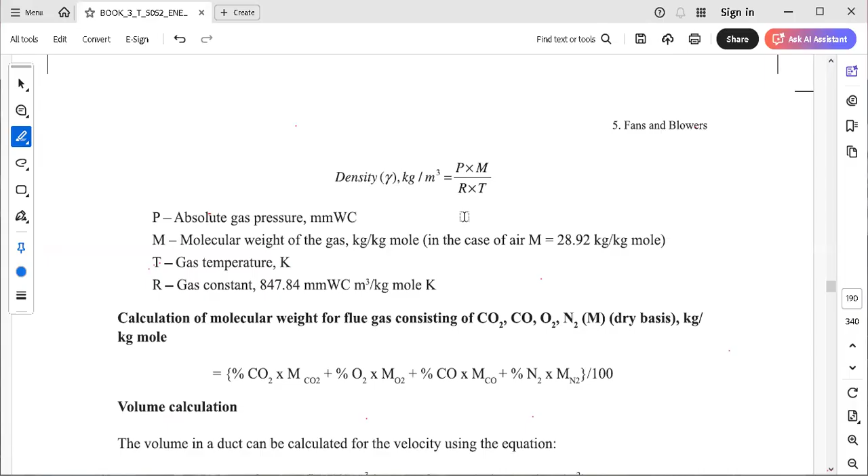They mentioned that whenever there is a calculation for the molecular weight, we have different gas constituents like CO2, CO, O2, N2, and so on, on a dry basis, in kg per kg mole. You have to take the percentage of CO2 and its molecular mass, percentage O2 and its molecular mass, percentage CO and its molecular mass, percentage nitrogen and its molecular mass, divided by...

You can calculate the volume in the duct, volume of flow Q in meter cube per second, which is velocity V in meter per second into the area. Now there are two efficiencies they have mentioned over here, which need to be considered because these efficiencies are more important from an energy conservation point of view.

The fan manufacturers generally use two ways to mention fan efficiencies. One is the mechanical efficiency, sometimes called total efficiency, and the second one is the static efficiency. Both measure how well the fan converts horsepower into flow and pressure.

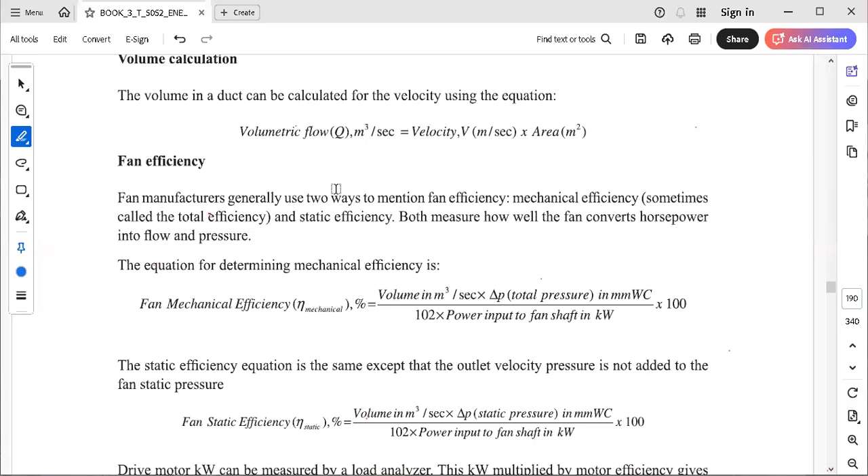So the fan mechanical efficiency, in percentage, is given by volume in meter cube per second into delta P, that is total pressure in mm of water column, divided by 102 into power input to the fan shaft in kilowatt.

Secondly, the static efficiency equation is the same, except that the outlet velocity pressure is not added to the fan static pressure. So the only difference is that here total pressure is considered, whereas in the static efficiency, static pressure is considered. The remaining equation is the same: volume into delta P divided by 102 into power, where delta P is either total pressure or static pressure.

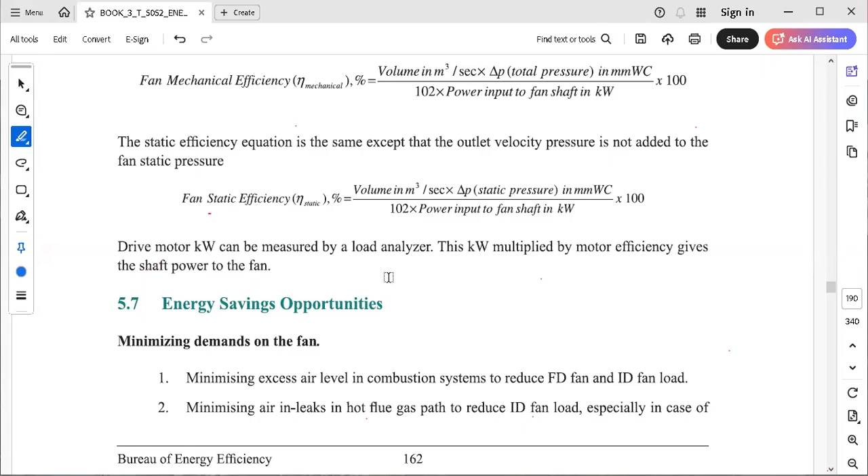Now there are a few energy saving opportunities we have to consider: minimize the excess air level in combustion systems to reduce FD fan and ID fan load, minimize air in-leaks in hot flue gas paths to reduce ID fan load, especially in boiler plants and furnaces. Cold air leaks increase the ID fan load tremendously because of the density increase in flue gases, and in fact choke up the capacity of the fan, which results in a bottleneck for the boiler itself.

Third, the in-leak and out-leak in the air conditioning systems also have a major impact on energy efficiency and fan power consumption, and that needs to be minimized.

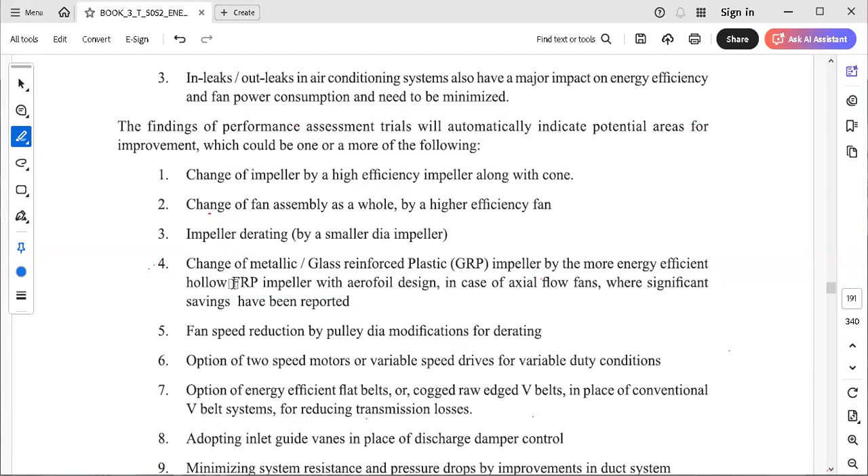A few findings of the performances: we have to change the impeller by a high efficiency impeller, change the fan assembly as a whole with a higher efficiency one. Impeller derating, change the metallic or glass reinforced plastic with the FRP impeller. Fan speed should be reduced. The option of 2-speed motors or variable speed drives are more useful in variable duty conditions.

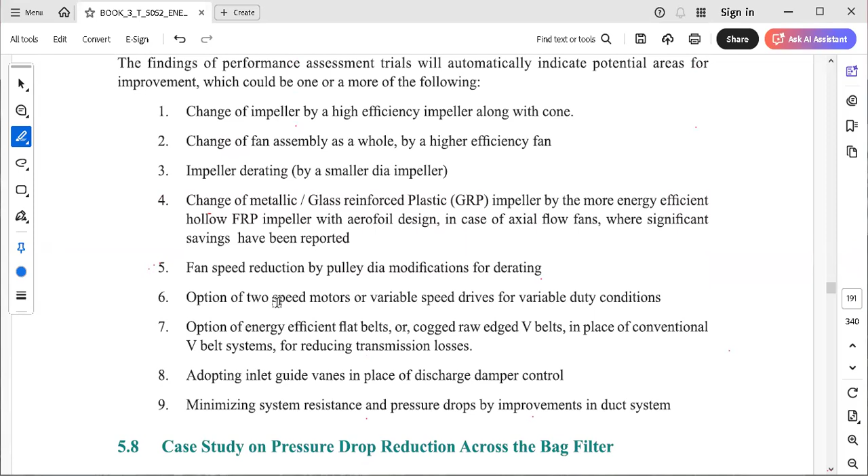The option of energy efficient flat belts or cogged raw edge V belts is adopted in place of conventional V belts. Then adopt inlet guide vanes in place of discharge damper control, and minimize the system resistance and pressure drops by improvements in duct systems.

Now there is one case study they have taken.

Okay, sir, is it up to 5 p.m. or 5:30 p.m.? I think... okay, 5:15, no? Okay, till you can say, yeah, till you can say I will continue, and whatever remains I will cover tomorrow. Tomorrow also one session I think we can have. Batul sir had joined. Sir, Harshad here. If you want to continue, you want to finish the lecture, you can finish it, later on I'll start my lecture. Yes sir, yes sir, just give me 10 to 15 minutes sir. Thank you, okay sir, okay sir, no problem, thank you, thank you sir.

Now there is a simple case study of pressure drop reduction. There is a problem that arises for the bag filters of a cement mill. The problem is a high pressure drop across the bag houses while producing one particular type of cement product. The reason they found is that the characterization of a particular size distribution, with its fineness, is creating high differential pressure across the bag houses. So different sizes of the cement particles are creating this problem.

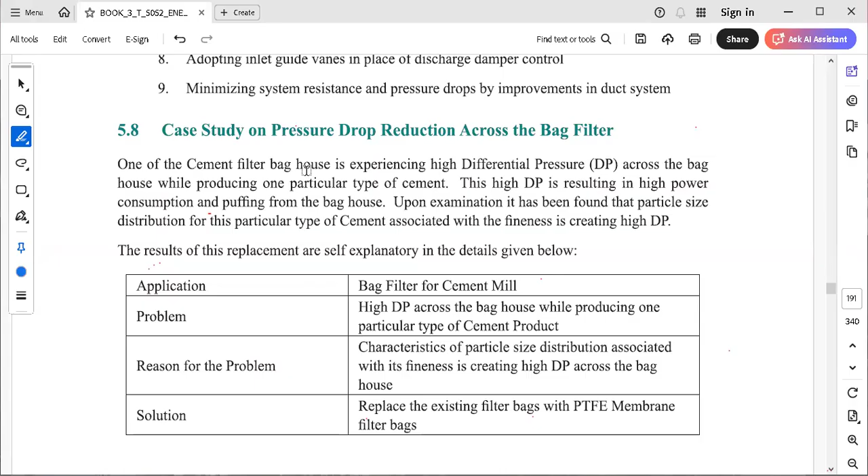So what will be the solution? They simply applied replacing the existing filter bags with PTFE, that is polytetrafluoroethylene membrane filter bags. They also mention the result, which is excellent: a reduction of 50 mm water column differential pressure across the bag house, and a reduction of 5 kilowatt hour in power consumption.

They mention the parameters for existing bags versus bags with membrane: their gas flow, temperatures, and materials used. The interesting part is the DP, the differential pressure. Initially it was 165 mm of water column, and now it drops to 115 mm of water column. The consumption also reduced from 51 to 46 kilowatt.

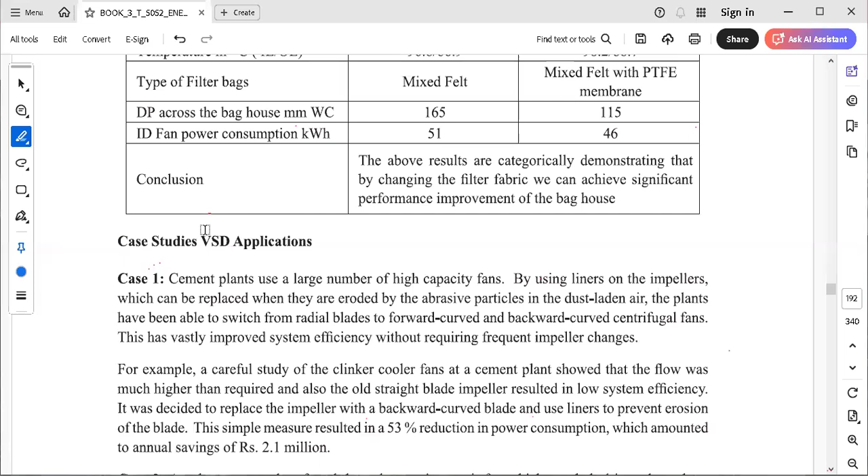So what are the conclusions they mentioned? Our results categorically demonstrate that changing a filter fabric can achieve significant performance improvement of the bag house. Like that, they mention different case studies in the slides, including one on VSD.

They mention case studies 1, 2, 3 and 4, showing reduction in power consumption if you go with high capacity fans with variable speed drives. The last one shows a simple measure resulting in 53% reduction in power consumption, amounting to an annual saving of 2.1 million.

So in cement industries, how can we achieve this? The clinker cooler in the cement plant shows that flow was much higher than required. The old straight blade impellers result in low efficiency, so instead of straight blades, they go with backward curve blades. This increases the performance of the fan, resulting in a 53% reduction in power consumption, and compared with cost, it becomes 2.1 million savings observed by them.

Like that, there are different case studies; we will not go into that. You can just go read that one, how simple it is.

I just want to point out one thing. As you are in industry, have you used it? Have you heard about CFD and the software used for CFD?

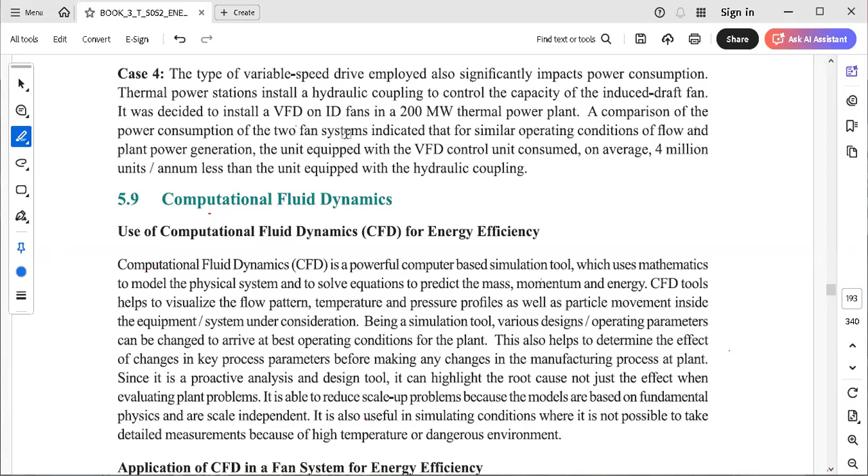CFDs are considered for the variation of fluid flows. I also came across this new concept. Normally in academics, computational fluid dynamics is considered for fluid flows, heat transfer, or combustion related parameters. But for the first time, I have seen how CFD is used for energy efficiency.

Just take a look over here. This is the older design of a factory where the induced draught flow, which has a double-inlet fan, has been considered. This is the diagram of a system which has induced draft fans.

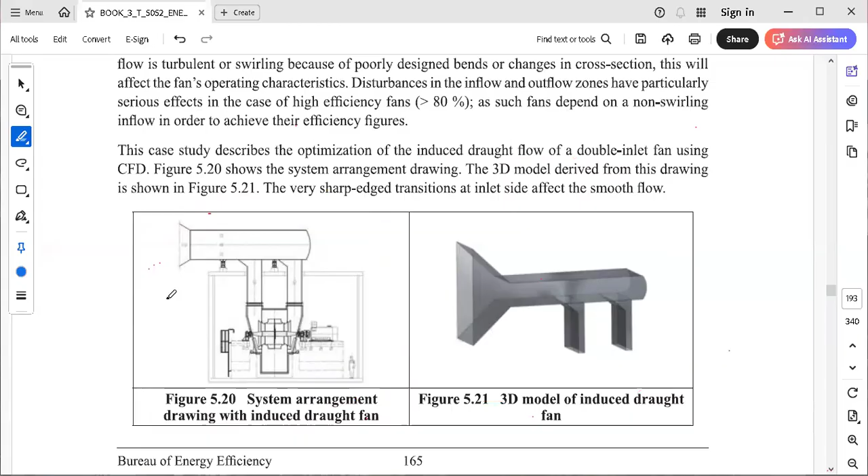That efficiency improvement: the pressure drop is decreased from 251 Pascal to 66 Pascal, which will give a 49 kilowatt saving for the system.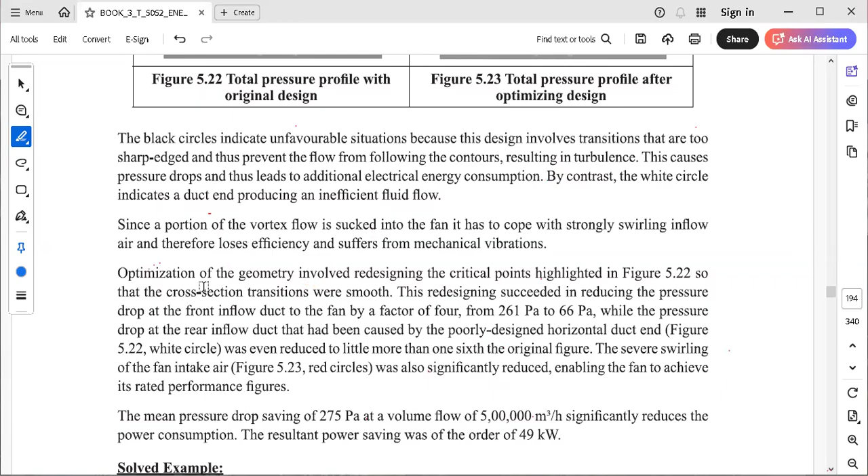So such systems we can analyze with the help of CFD, because sometimes we cannot go with experimental work each time. So for that, these CFD systems are more helpful to design or predict corrections for existing designs.

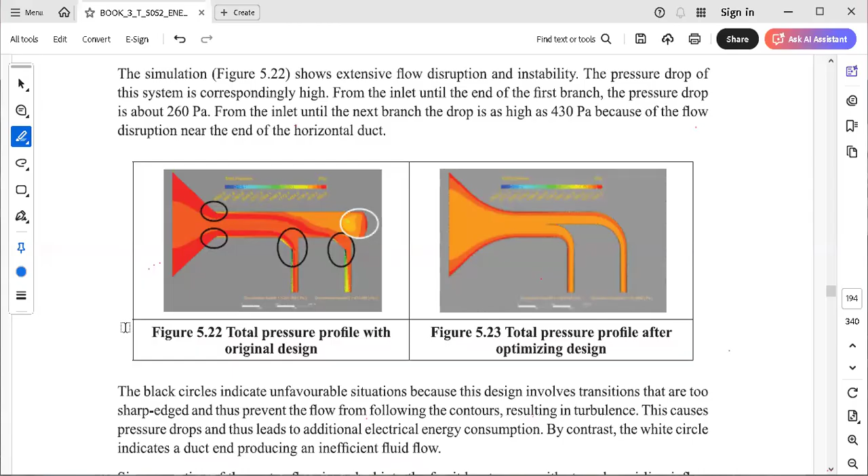The last point related to this is a case study. A V-belt centrifugal fan supplies air to a process plant, and a performance test on the fan gave parameters: air density, ambient temperature, diameter, velocity pressure measured by pitot tube in the discharge duct, pitot tube coefficient, static pressure at fan inlet, static pressure at fan outlet, power drawn by the motor coupled with the fan, belt transmission efficiency, and motor efficiency at operating load.

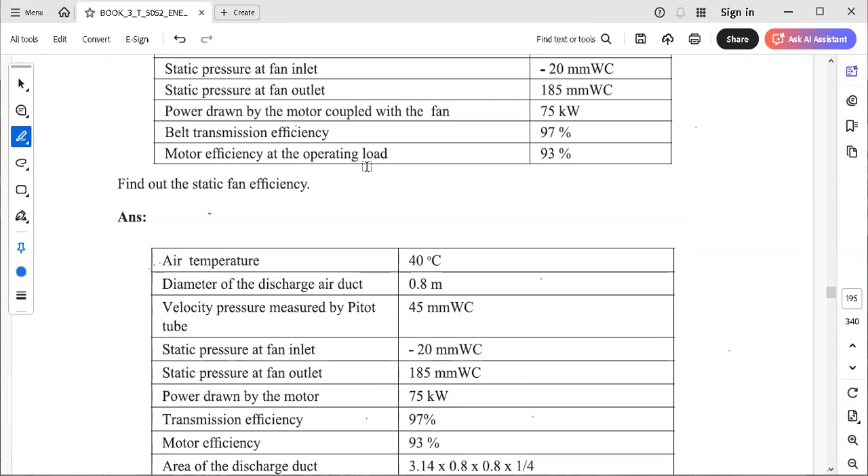So these are the parameters given, a few of which they have mentioned here. With the help of these parameters, first they calculated the area of the duct.

They calculated the area of the duct using pi d squared by 4, where d is the diameter. So d square is 0.8 times 0.8, times pi, divided by 4. This is the area they calculated.

Then they calculated the corrected gas density: 273 into 1.293. This 1.293 is the density of air multiplied by its temperature. This density of 1.293 is at 0 degree centigrade, but our system is at 40 degrees centigrade, so temperature into density divided by the 0 temperature and 40.

This is like A stands for B. What will be the value of X? For 0 degrees, 1.293 is the density; what is it for 40 degrees? We cross multiply and find out, which becomes 1.1277. Then with this equation we find the volume, which becomes 12.65 meter cube per second.

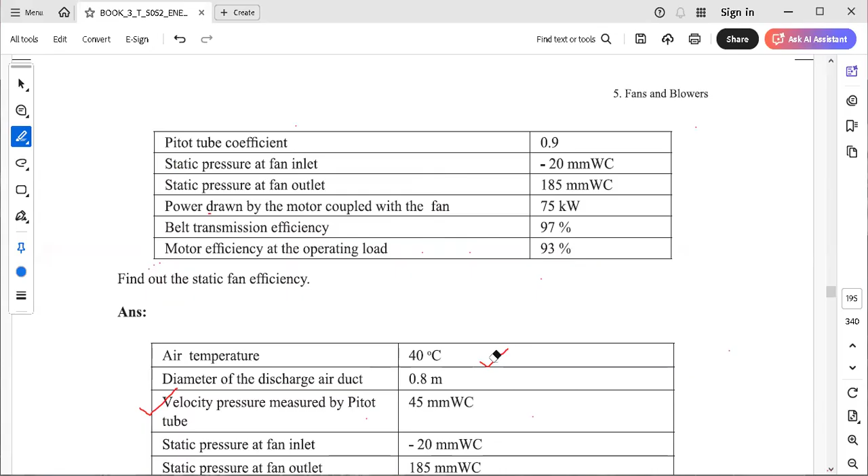So the power input is 75 into 97 into 93, which becomes 67.65. Then we have to find out the static efficiency.

Static fan efficiency is volume times total static pressure difference, times 102, divided by power input. The volume we calculated here is 12.65. The static difference: they mentioned 185 mm of water column minus the static pressure at inlet, that is minus 20. So multiply by 12.65, divided by 102, using the power output we took, static power output 67.65.

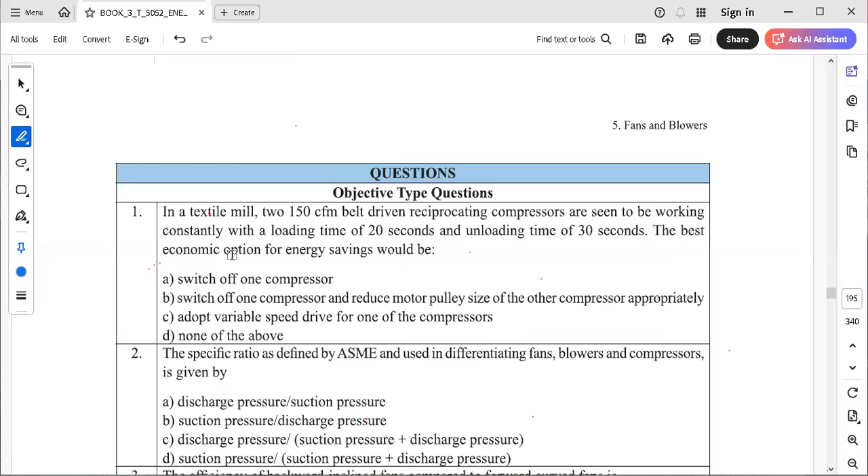Then the fan static efficiency becomes 37.58%. So this is the static efficiency calculated with the help of numericals. In this chapter, they have only mentioned simple numericals and their values. So these numericals we have covered.

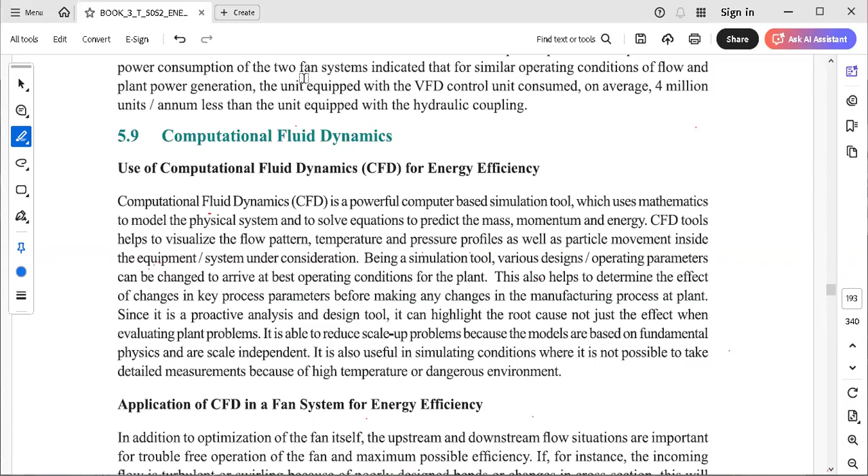Then can we go for the last one, the MCQs? Everyone has taken it. First one: in a textile mill, two 150 CFM belt-driven reciprocating compressors are seen working constantly with a load time of 20 seconds and unloading time of 30 seconds. The best economic option for energy savings would be: switch off one compressor and reduce motor pulley size of the other compressor, adopt variable speed drive for one of the compressors, or none of the above. What do you think?

Option B. Because the unloading time is more than the loading time, which is 20 seconds, it is better to switch off one compressor, and for the second compressor reduce the pulley so we can get the best efficiency. Yes, that is a good example. So the answer is B.

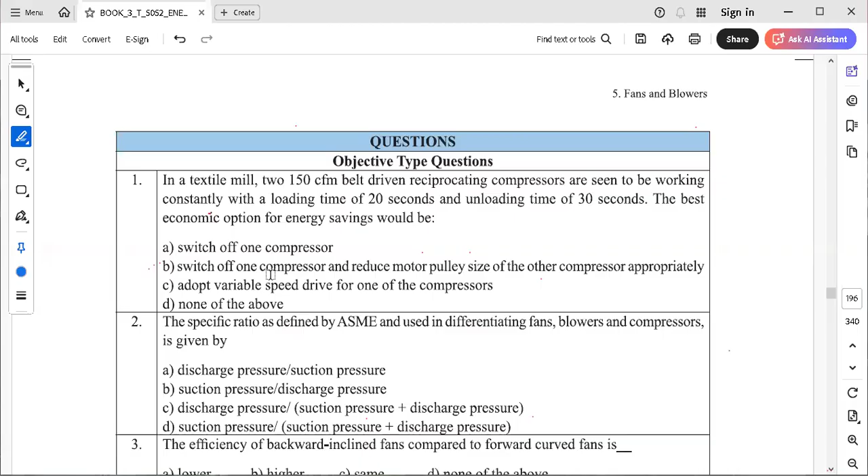Next, the specific ratio as defined by ASME and used in differentiating fans, blowers, and compressors is given by: A. discharge pressure upon suction pressure, B. suction pressure upon discharge pressure, C. discharge pressure upon suction pressure plus discharge pressure, D. suction pressure divided by suction pressure plus discharge pressure. Specific ratio is discharge pressure upon suction pressure, right? Yes, then A.

The efficiency of a backward inclined fan compared to forward curved fans is higher, not lower. Higher.

Fourth one: for centrifugal pumps, the relation between shaft input power and speed is given by KW1 upon KW2 equals N1 cube upon N2 cube. The power is related to the speed as a cube.

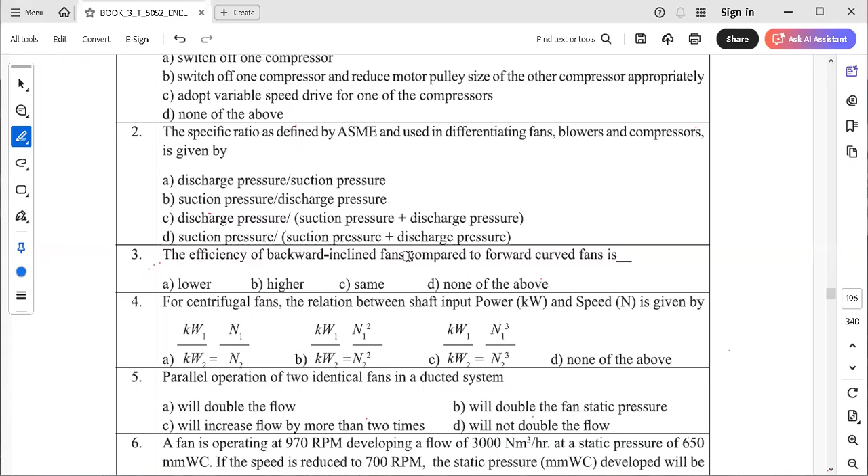Specific speed, pressure is N1 square, and discharge is related with the speed.

Then parallel operation of two identical fans in a ducted system: it will not double the flow.

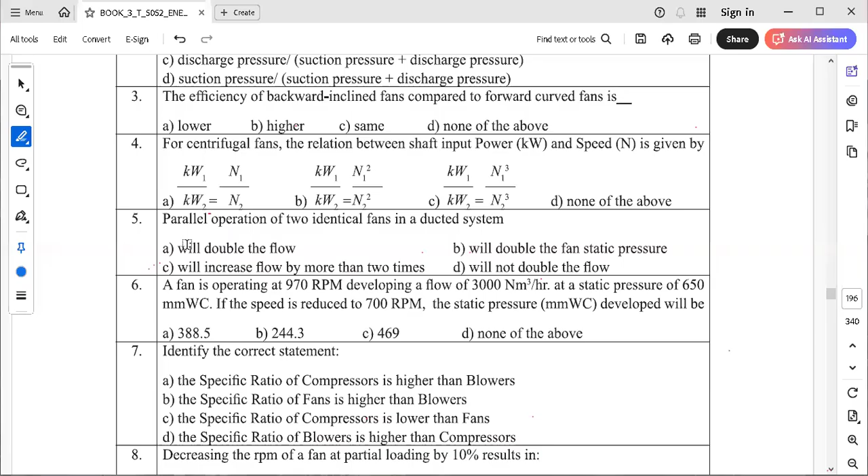Question 6, I have not calculated. You can calculate it, I also calculated that one and we will come back to it. A fan operating at 388.5 - I calculated 388.5. Yes, I will calculate and come back to that one.

Identify the correct statement: A. specific ratio of compressors is higher than blowers, B. specific ratio of fans is higher than blowers, C. specific ratio of compressors is lower than fans, D. specific ratio of blowers is higher than compressors. Compressor has the highest specific ratio, so it is A.

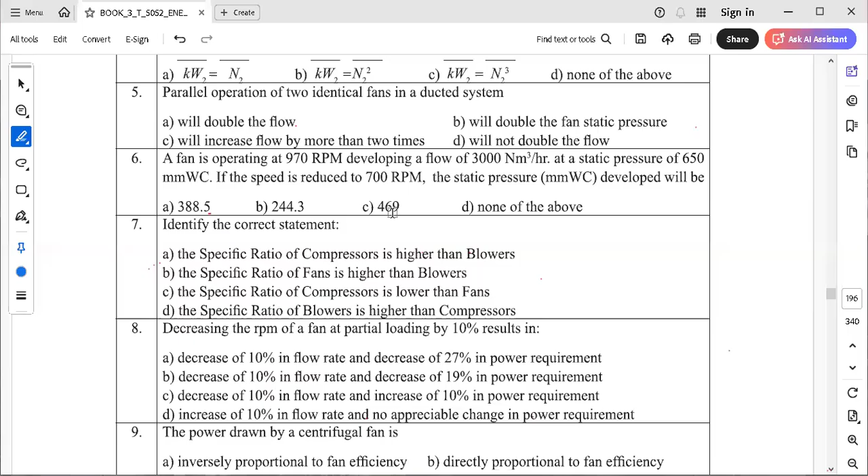Decreasing the RPM of the fan at partial loading by 10% results in: A. decrease of 10% in flow rate and decrease of 27% in power requirement, B. decrease of 10% in flow rate and decrease of 19% in power requirement, C. decrease of 10% in flow rate and increase of 10% in power requirement, D. increase of 10% in flow rate and no appreciable change in power requirement. It is A actually - decrease of 10% in flow rate and 27% in power, as mentioned in the notes.

Now the last point: the power drawn by the centrifugal fan is A. inversely proportional to the fan efficiency, B. directly proportional to the fan efficiency, C. inversely proportional to static pressure, D. inversely proportional to flow rate. Option A is correct, because they have given it tricky - we have to find the fan efficiency and correlate it with the power, divided by 102 into power, whether static fan efficiency or total fan efficiency, it is inversely proportional to the power.

The last one, question 10: the main reason for using variable frequency drive (VFD) for capacity control in electrical motor driven centrifugal fans with fluctuating load is A. improved power quality, B. fan capacity is proportional to its speed whereas power drawn by the fan is proportional to the cube of its speed, C. improved power factor, D. precise closed loop process control.